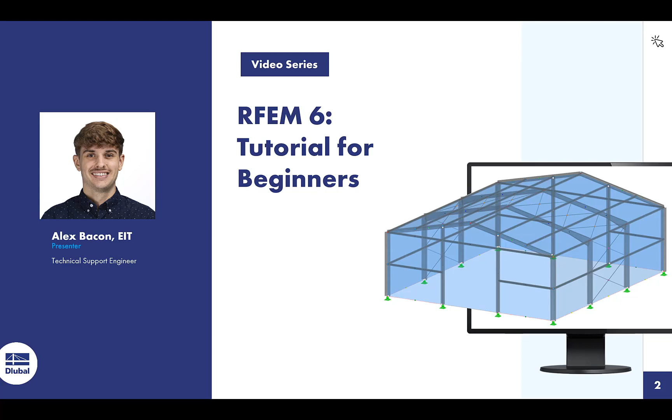First, what is RFEM 6? RFEM 6 is a powerful structural analysis software which engineers worldwide have been using for structural analysis and design for more than 30 years. With the help of RFEM, 2D and 3D structures of various materials and shapes can be created and calculated in the blink of an eye.

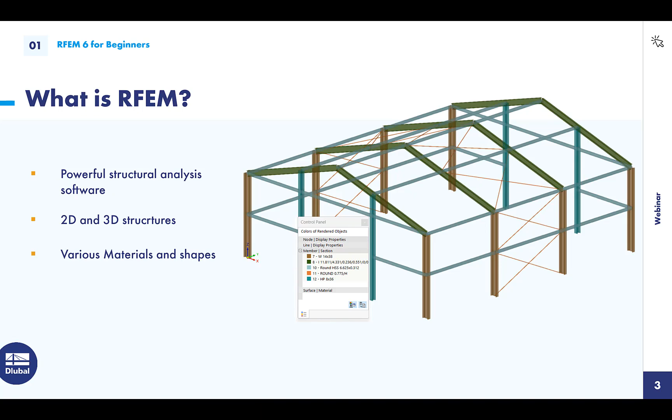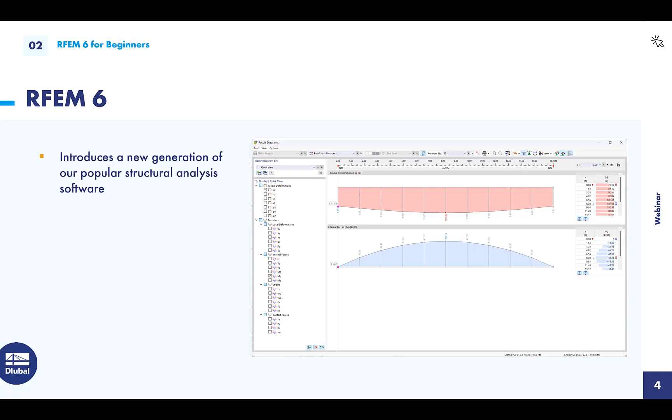RFEM 6 introduces a new generation of our popular structural analysis programs. Thus, you can expect powerful, simple, and intuitive tools for your daily tasks. As you know, our goal is to provide the best results for our customers and stay true to the slogan, enjoy structural analysis. RFEM 6 offers a great variety of changes and improvements that make modeling faster and more enjoyable.

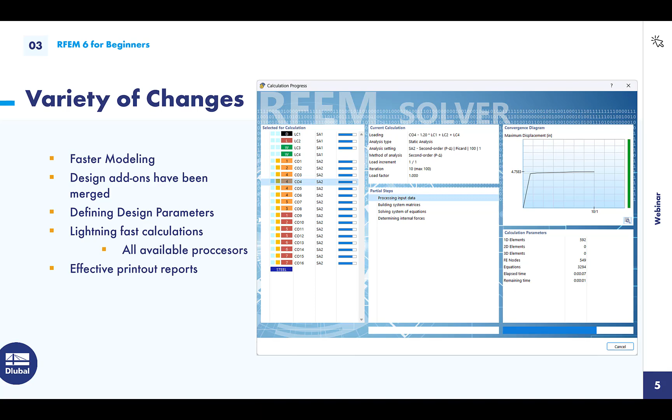For example, we have merged the design add-ons with the software. In this way, you can define certain parameters of the design during the modeling process to save time. And you can create lightning-fast calculations and effective printout reports. For this, the program uses all of the available processors that your computer has.

Our online course consists of around 20 chapters. These videos will consist of modeling a simple 3D steel hall and performing the calculation and design for the structure. First, we will start with the installation, and then we will create a new model and go through the base data, and this will also consist of getting to know the user interface.

We will dive into modeling and discovering the new functions of RFEM 6. Afterwards, we will load the model and use our popular load generators. As soon as we're finished with loading, we will take a look at the results, perform various steel designs, and then finally the documentation of the results will be generated, and we will go through how to improve the printout report and learning its purpose.

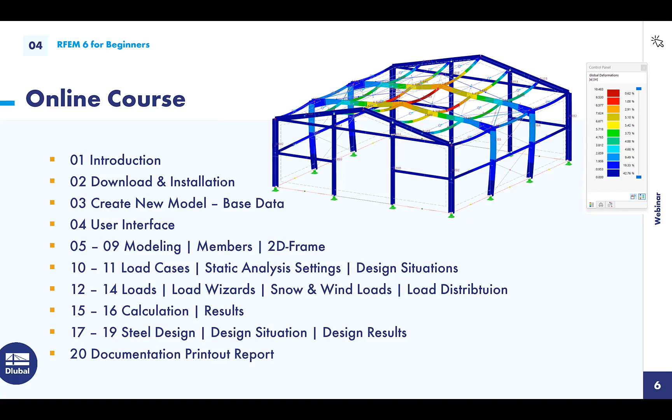To retain as much information as possible, we recommend that you model along with these video tutorials. You can also pause the videos at any time and go through the individual steps again.

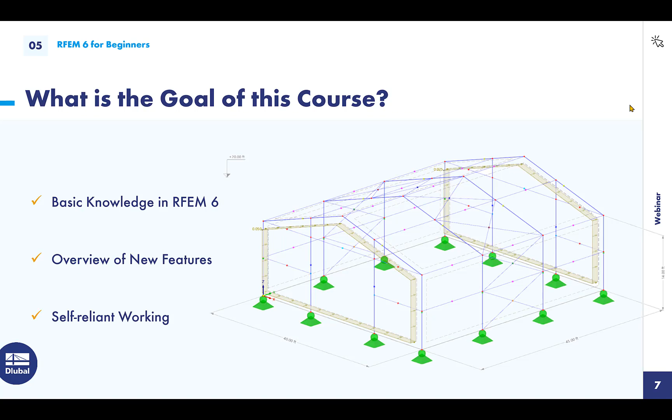What is the goal of this course? The aim of this online training is for you to gain basic knowledge in RFEM 6 and to be able to quickly find your way around the new features of this software generation, and also to be able to reliably carry out simple designs on your own. Thus, this video series is not only suitable for beginners, but also advanced users who are experienced and also want to gain more insight into RFEM 6.